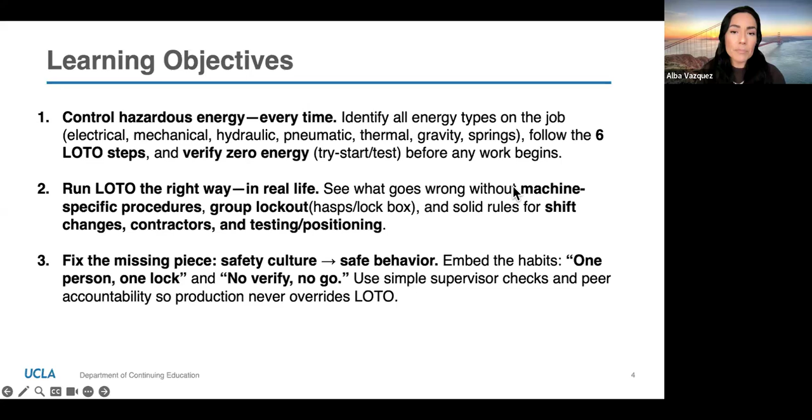And so there's this false sense of security that when they open the gate, if it's an interlock guard, they can put their hand in. So we're going to talk a little bit about that. How do we improve these issues of safety culture? All right. So why is this topic so important?

There is an actual site in Cal OSHA, or a link to the top 10 most frequently cited. Now, I don't want you to think that the only reason I want you to know this topic is because I don't want you to get cited by Cal OSHA. Mind you, most of you are coming from the supervisory or management side of the equation. So you do want to make sure you don't get citations. But the bottom line here is we care for our employees. We don't want them to get hurt because once they get hurt, it's a lose-lose situation, right?

So that's why this topic is super important, because Lockout Tagout is always one of the top 10 most frequently cited for California OSHA and nationwide. OSHA issues about 2,500 to 3,000 citations each year, most of them to general industry, because general industry is everything but construction or maritime or mining. Mining, construction, maritime, they have their own set of rules. But mind you, a lot of the people even in construction sometimes may perform maintenance activities that are considered general industry.

So mostly in manufacturing, nevertheless, that doesn't mean if you don't have a manufacturing plant, this is not going to happen to you. Remember, anytime you have a piece of equipment that needs to be repaired, maintained, unjammed, Lockout Tagout will apply. There's very few exceptions, okay? There's some exceptions, like the cord and plug. Nevertheless, this is why. And I just did this screenshot because Lockout Tagout, and then it has the regulation number 3314, California Code of Regulations 3314.

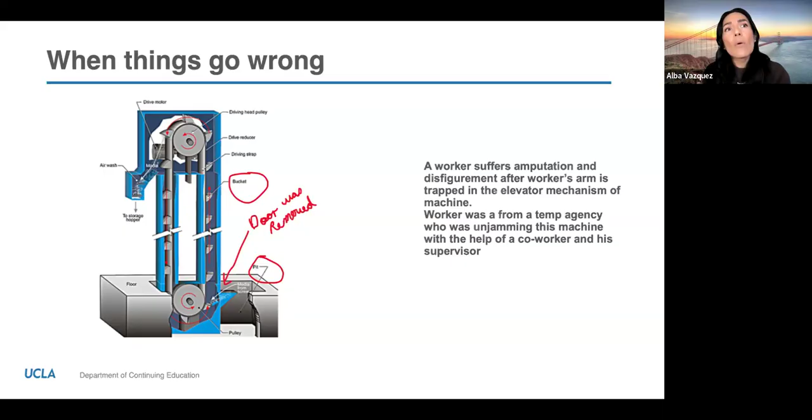So we need to always think, now investigation takes place, Cal OSHA shows up. It's important for us to now really learn from our mistakes and see what is it that went wrong. And I'm going to talk about a couple of things that would be good.

Okay, now there is a great example by WorkSafe BC. This is about a sawmill and how it just really takes seconds to lose a limb. You will receive the link for this one. Veronica, do you think that we'll have a little bit of time for this video? I'll tell you when to stop it, just to kind of look at what this one brings to the table, please. Sure, I'll go ahead and show it right now.

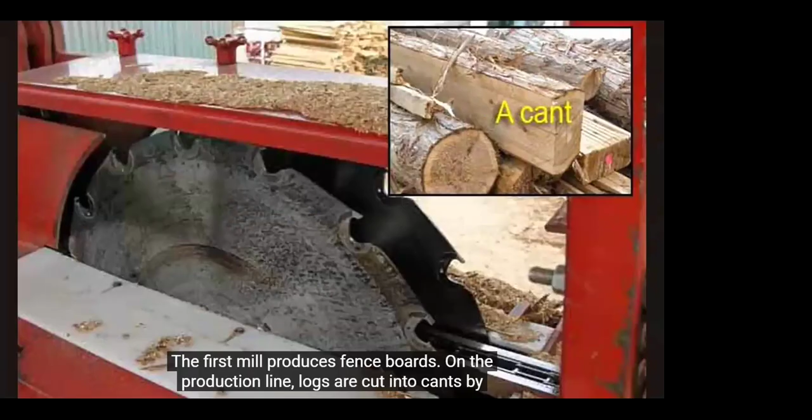I'm Mike Bertrand, investigating officer with WorkSafe BC. In sawmills, cleaning out saws and clearing jams are done all the time. At two mills, these tasks went terribly wrong. The first mill produces fence boards. On the production line, logs are cut into cants by a scrag saw. In the meantime, cants are pulled along the production line by a log chain. The sawyer feeds the cants into the edger saw, which cuts them into boards, some of which are then trimmed into fence pickets.

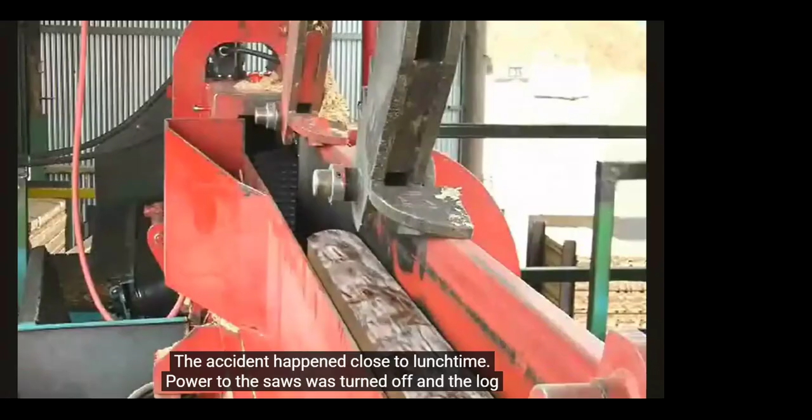Okay, so the video is not playing and I'm not going to spend more time. You're going to get the link though. The video's not playing? Oh, it's showing on my end. Oh, okay, no problem. Everybody can see it except me. That's fine. Do you want me to play it all or just stop it there then? No, it's fine. Okay, you could go ahead and reshare your screen then, Alba.

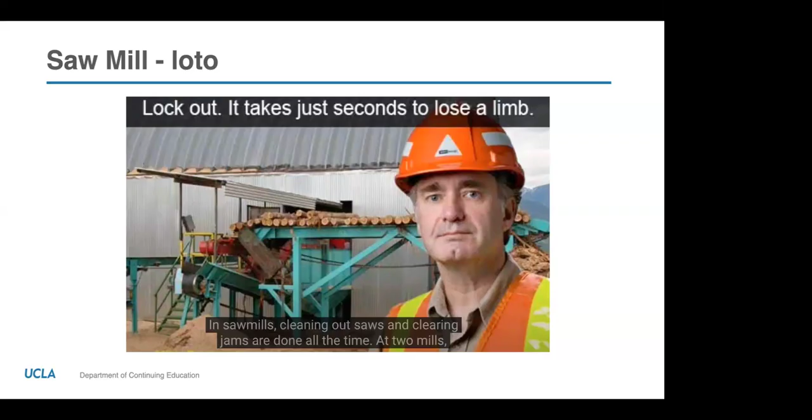So basically, the key to this one has to do with trying to clear a jam, right? How it just really takes seconds to lose a limb. What I wanted to illustrate with this video is how easy it was for the worker to just reach, because you could see the wooden debris that was jamming the machine. But with the saw that cuts these pieces of wood into picket fence type 2x4s, even if you isolate energy, there's always that residual motion from the saws rotating, and that's what got the limb off, right?

And so the lesson for this video is all sources of energy need to be isolated. So not just locked out and tagged out, but what else? What residual energy is there that we might get hurt by if we try to unjam or to repair or maintain? So this is a great video for that purpose, and you will receive a link for that one.

The next one is a great example. It is on the home page of Cal OSHA, and it's a supervisor explaining to a worker not to reach inside the machine because she's going to get her fingers cut off, and explaining briefly how to apply lockout tagout. I'm not going to play it right now; take a look at that video on your own. But I love that supervisor, very hands-on, telling her, I know this is where the jams happen often. Do not reach in. Do not put your fingers, because your finger's going to go.

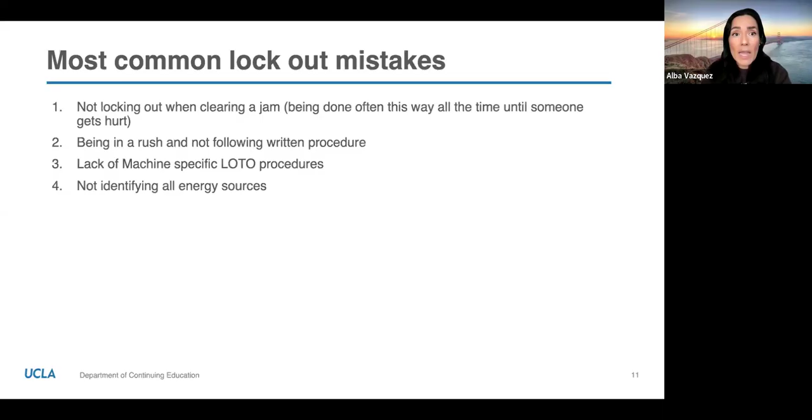Sometimes we don't identify all energy sources for that piece of equipment. And I like that video you saw with the sawmill, because the residual motion of the blades was one type of energy that needs to be identified, and the authorized employee trained so that they know how to tell when the motion has stopped, how to block it, and then they can go ahead and do the task. And of course, there are steps I'm missing, the testing and verifying. Okay, so just mistakes right now, and then we'll see the actual steps and talk about which is the most important, right?

Oh, well, here it is. Number 5, not verifying or testing that the energy has been isolated. So let's say a worker says, okay, my dough mixer only has electrical energy. I just have to unplug it, put my lock and my tag on. Energy has been isolated. That's it. And then they start unjamming, but they never verified or tested it, right? And maybe that was not the actual breaker feeding that machine, and boom, the machine starts working, and there goes their finger.

So verifying and testing before you start the activity allows you to really see that you applied the lock and the tag in the right place. Sometimes buildings are old and get refurbished, or there are changes to the wiring, and you are locking out and tagging out the wrong breaker, the wrong device.

Not using lockout tagout when equipment has an interlock system. Interlock systems are very interesting because they are not meant to be your only source of protection. Like I said, your guarding and your lockout tagout are two different safety things that protect the worker. So an interlock system is a guard, right? And so I'm going to go back to the dough mixing, if you can picture in your mind a big industrial mixer at a bakery, let's say.

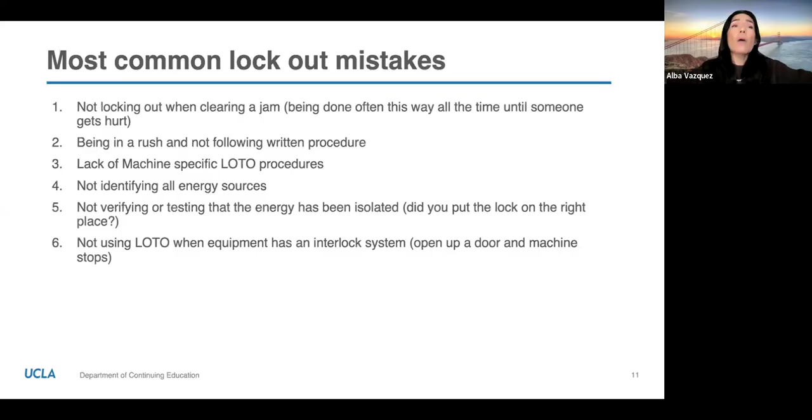Well, that's an example of when an interlock system is used the wrong way, because it's not meant for you to go and unjam it or make an adjustment. It's just meant as a safety device in case someone opens that gate by mistake while the machine is functioning, that everything stops. Oh, oops, sorry. Close it. No problem. It's a guard. So an interlock system is a guard. It's not a lockout tagout device.

Okay, the next one is the lack of training, because we have authorized employees who work with the machines and sometimes they're not on site. And so the affected employees who use the machine feel that they should fix the machine, not wait for the maintenance people or the authorized employee. And so these are some of the most common lockout tagout mistakes that we find.

Another thing that gets cited often is no audits. What you're going to find once you read the regulation is that you're supposed to review your procedures for your machinery and equipment once a year. This is never done. I don't know any of my clients that, when I start working with them, have records of the annual audits, but the better they get with the regulations and their specific procedures, they start doing them. And so that's what you want to do.

Poor communication, of course: workers around the machine or equipment that is being worked on are not informed that lockout tagout will happen. And so there is poor communication and there's this big question mark. Oh yeah, that guy is there under the machine. He's working. And then you go in and you're like, everything okay, buddy? Yeah. Did you apply lockout tagout? No, so-and-so told me that they didn't have the lock. And there's that lack of communication.

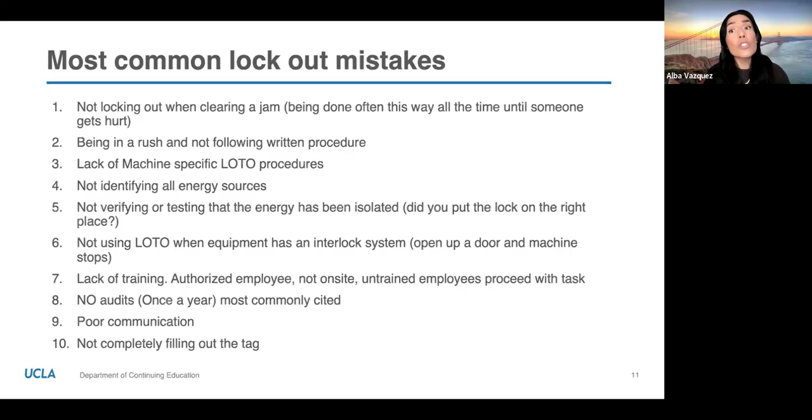Of course, there are systems where people do lockout tagout so often that they just color code or have a very good way of identifying who that lock belongs to, and so the tag is not required. You will see that those are nuances in the regulation. Nevertheless, don't get tags that have a lot of information on them and then you reuse them and have dates that are 3 years ago. So make sure that you keep your process nice and clean.

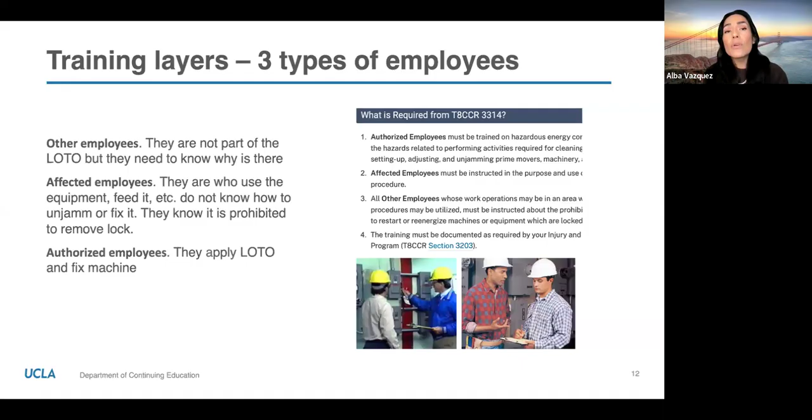Look at your tags. There are 3 training layers. You have other employees, affected employees, and authorized employees. Other employees are people that are around the equipment, but they don't clean it, they don't fix it, but they need to know not to mess with it, so they need to know what the lockout tagout hardware looks like. And what does that mean if they see the machine is down and they find a lock? It means don't mess with it. This is something that you do not want to get curious about and try and restart a machine. So that's with the other employees.

The affected employees are the people that work with the machine. They're usually at the conveyor belt, ensuring that all this food gets into the grinder. Okay, they are the ones operating and working with the machine. But if they do not have lockout tagout training and they're not qualified, and that's the word in the regulation, qualified to actually fix the machine, they are not an authorized employee.

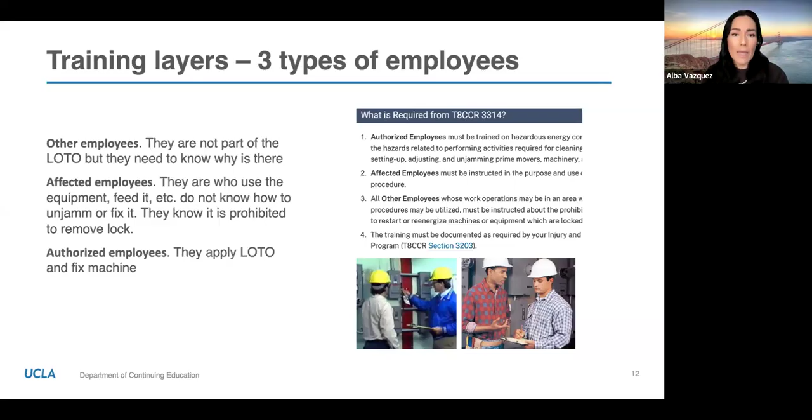Authorized employees many times are the same affected employee if they work with the machine and they also unjam and service the machine. So that employee could be both, but most of the time you have affected employees who use the machine who do not fix it. Okay, and you would have to have 2 layers of training there.

So these are advancements in technology that will help you with those robotic arms where you're thinking, I cannot go to the energy source and lock it out just because I want to enter and adjust the piece of material. And so this is a great video that illustrates the right way. The only thing I'm still iffy about is how are they testing and verifying that it's been locked out and tagged out? But it is a very good example.

I mean, the machine is locked. Both types of energies have been identified. So there's hydraulic and there is the electric. He turns off the machine, goes to both, locks them all.

He doesn't apply tags, which to me is interesting, and it could have to do with the fact that he is the only one operating the machine at that moment. The video is advertising these systems, and that's why I like this video, because it's advertising a system on how to get your robotic palletizing cells compliant by having a system of a trapped key.

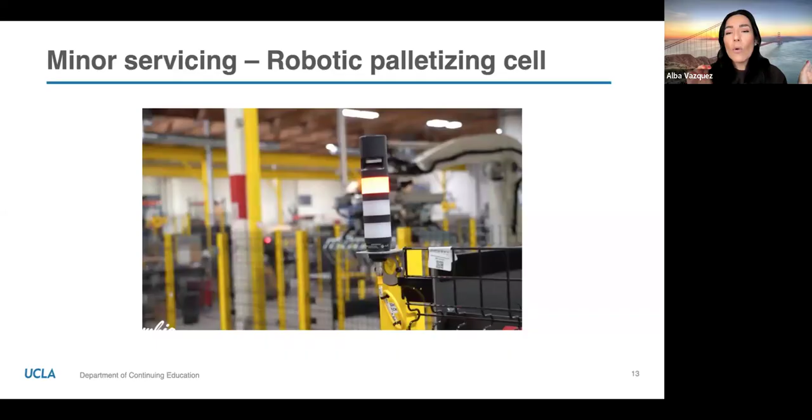That's just the guard. The guarding requirement is that you isolate the moving parts from the worker in case of accidental contact with the moving part. It's not intended for you to go in there and adjust or unjam. But if you're going to make an adjustment, which often we have to do with palletizing robots, the robot did it, it's just a little bit off, you go in there and just move it. Well, that's an adjustment. You have to lock it out. And the video shows how quickly and how easily that can be done.

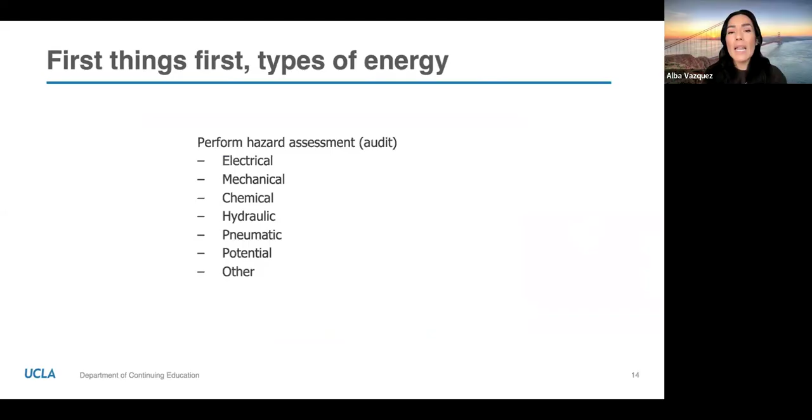All right. So first things first, you have to do an audit to determine the types of energy that feed your machinery and equipment. So from electrical to mechanical, chemical, hydraulic, pneumatic, potential, and others. And you can use forms like this one where you find the hazardous energy power. So if it's electrical, is it battery operated? Is it a capacitor that also stores energy?

What is it? And then the energy isolation disconnecting device. So is it a switch? Is it a motor control? Is it a power panel, right? And then you may have like 5 different power panels. So which number? Which one is the one that you are identifying as the one that feeds that machine?

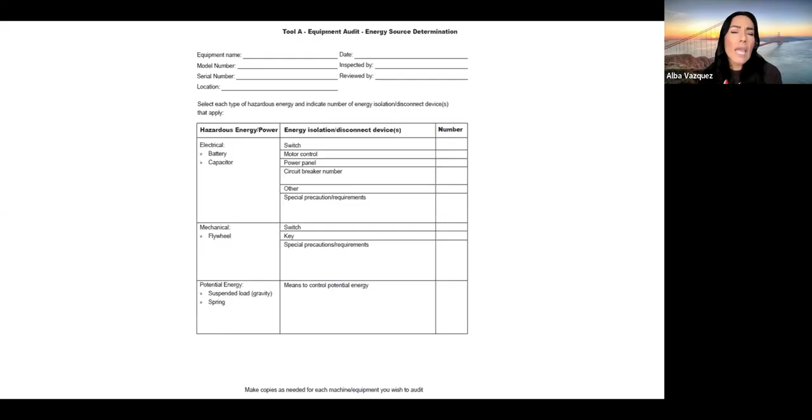Mechanical energy, potential energy. And by the way, these forms are Cal/OSHA forms. I don't think they're on the website, because they update their procedures, but I like these forms. I still use them. If you want them, I can also attach them to the actual presentation file.

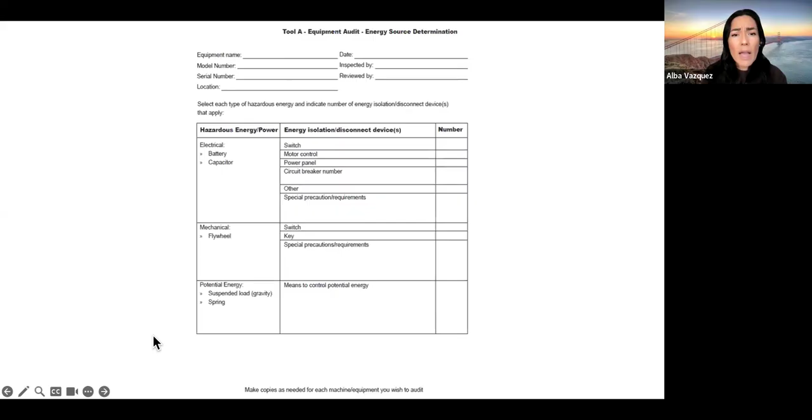But you see how awesome it is, because then you go through each of them and at the end, is there any other? So please fill in the energy isolating or disconnect device for that type of energy. And I don't think on this list you have gravity, suspended load. Yeah, you have suspended load gravity on that first page. So pneumatic, chemical, thermal, etc.

Okay, so here are your 6 basic steps to lock out and tag out a machine. You prepare for shutdown, and when you prepare your shutdown, you have to tell people. Here's where the regulation requires that you go, hey, everybody, we're going to fix this machine, or we're going to unjam this machine, so I do not want you to mess with it. We're going to apply the actual lockout/tagout. And then shutdown, isolation, applying the tags and locks, control residual energy, and verifying.

So here we go. The purpose of preparation for shutdown: knowing the hazards touching the machine. So before we even start this activity, we need to go to all of those identified energy sources, right? And now we're going to get our specific written procedure.

Take a look at it. Many times you already know it, and you will see in the video with the palletizing cell that it's something that he already knows, but it wouldn't hurt to have the laminated procedure step by step there. Number one, preparing for shutdown. Tell everyone around that you're going to do lockout tagout. Step number two, that kind of thing. Just a quick reminder for the worker who's going to be doing it, right? And it's a written procedure specific for that machine. Notifying all the affected employees, right? Very, very important.

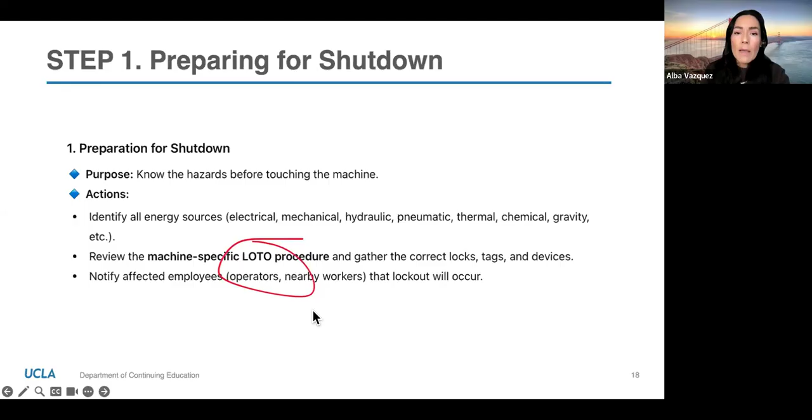Then machine or equipment shutdown. Stop the machine using the normal operating procedures, such as the off or stop button, and you wait for moving parts to stop. You will see in the video with the sawmill that that's what was missing there. The worker did not wait for the moving parts to stop, did not ensure all controls returned to neutral. And so all of these things are part of your step-by-step procedure, right?

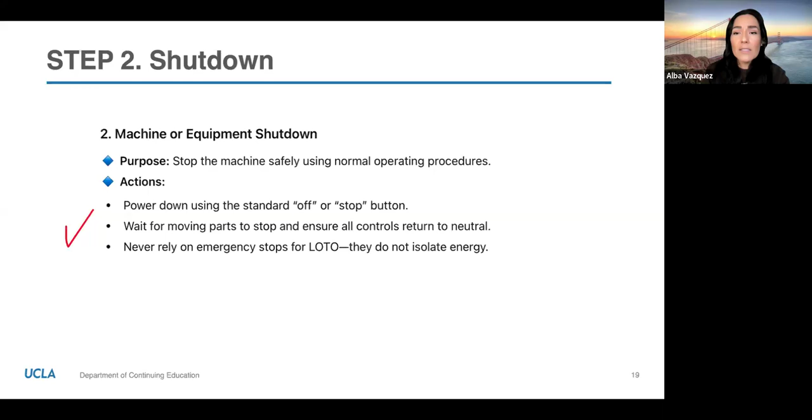Do not rely on emergency stop buttons, right? Because they don't isolate energy. Step 3, isolation of energy sources. You've got to open disconnect switches, close valves, block or bleed the line, because you've got to really do the job of isolating each and every one of the energy sources that you identify. Each energy source has its own isolation point. So there are requirements nowadays for your main breakers to have a way to attach lockout tagout devices, right?

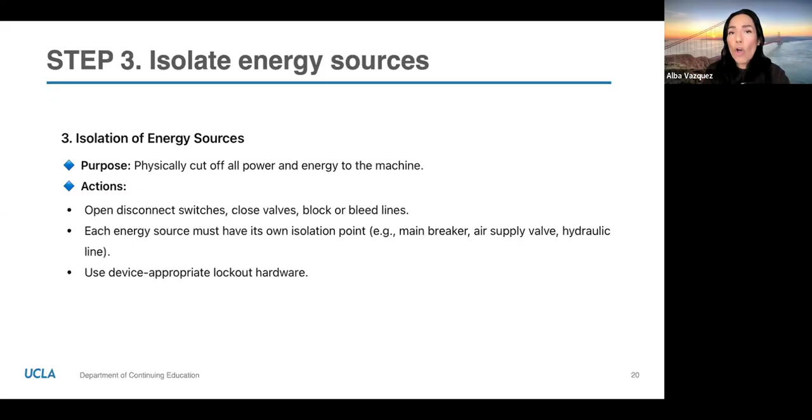And they also make hardware, for example, for air supply valves or hydraulic lines. They make devices so that they can be locked out and tagged out. So it goes around the valve, for example, a circular thing. If your valve is in circular form, then there's a device that goes around it, and it will accept a lock because it's required. And then you use appropriate lockout hardware, not just any lock, but specific for lockout tagout, and you buy it from your safety supplier, right?

Then you apply the lockout tagout devices, which is securely applying the locks and tags to all the isolation points. Each authorized employee, because we said the authorized employee is the one that will fix or clear the jams or service the machine, will put his own lock and his own tag. One person, one lock, right? And the tags include the employee's name, the date, the reason for lockout.

And then for group lockout, there's other requirements, but that happens when a machine is complex enough that when it's down, it needs maybe the electrician, the mechanic, two, three people to work on the machine. And so the way you do this now would be applying group lockout. So you buy a box for group lockout. There's a main individual who will say, okay, I'm going to walk to each of the sources of energy, I'm going to apply the locks, and the keys to those locks go inside this box. And you guys who are working on the machine are going to attach your locks to the box. It all matches and rhymes.

But here is another video that I think does a great job at explaining group lockout tagout. And of course, it's a TRADESAFE products video. So they are trying to sell you the group lockout tagout devices, the box with the actual hardware, but it's very nicely explained. Like I said, if we had more time, I would play all of these videos, but at least I'm giving you the information, I'm giving you the tools, so you go back and say, oh, wow, okay, this makes sense.

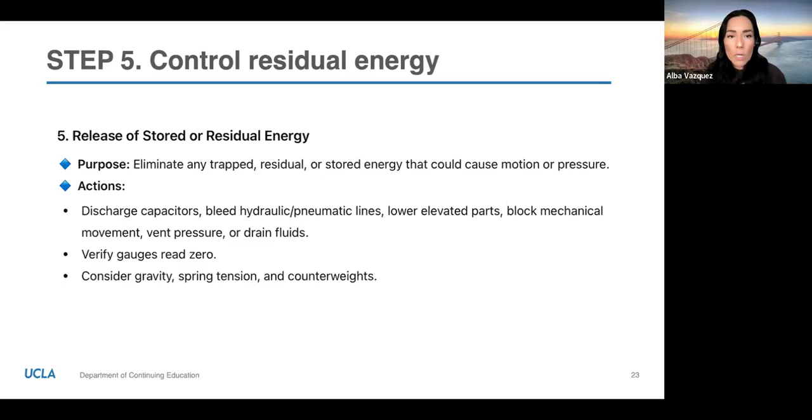So very cool. And last, verification of isolation: you try, start, or test. If it's electrical, you're going to test that there's no electricity going to the machine. It's the attempt to start that machine and equipment. So you are going to press that start button, and little did you know, the machine started when you pressed the start button.

You're thinking, what? But I applied the lock, right? I applied the lock, and when I pushed the start button, it started working. Something is really wrong. I am so happy that I am following my procedures, because I'm verifying that I truly isolated the energy, and I didn't. So as you can tell, the most important step of lockout tagout is not applying the lock. It's actually this step, verifying, testing, because now you test and the machine starts.

And so you go back to your electrician and they go, oh yeah, we worked on some of the wiring over here and we transposed this and blah, blah, blah. We're working on the plans to make sure that we let you know, and we haven't labeled it. And you're like, thank you, right? But this is why this step 6, verification of isolation, matters.

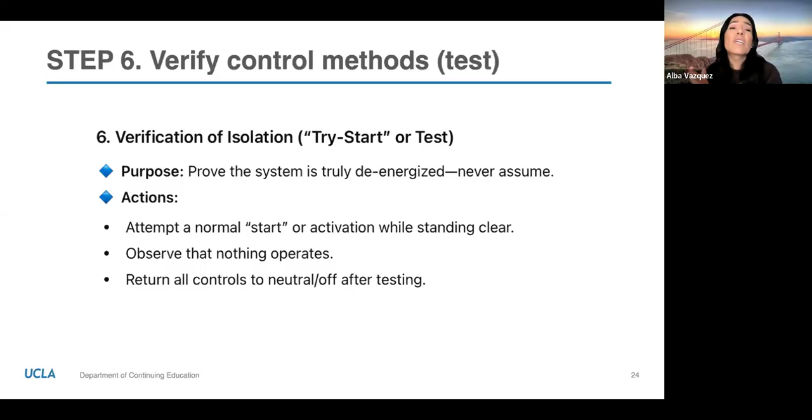And then just a sample, this is a general one, okay? This is the type of lockout tagout procedure that many of you have as your written lockout tagout program. So you take a form like this: this procedure establishes the minimum requirements for lockout tagout that could cause injury. Responsibility: the responsibility for seeing that this procedure is followed is binding upon all employees. Preparation for lockout: employees authorized to perform lockout shall be certain as to which valve and other energy isolating devices apply.

This is too general. You take this format and make it specific to machine number or lathe, and you mention the actual model and make, and you put it into your written procedure. That's why I like this one a little bit more, because it goes: which department, equipment number, location, old boiler room, the potential hazards, pneumatic, electrical, whatever it is. Methods of neutralizing, relieve pressure, lockout, tagout, very specific to notifying the production supervisor and the affected crew.

After completing step 1, shut down the equipment. If you are not sure how, contact the supervisor. Lock out the equipment following the lockout procedures at the wet transfer roll cabinet. So now it's very specific as to what location, where it is. A lot of people add pictures to this, which is a fantastic idea. Some of you also have to get safety permits, like a hot work permit or other types. It's a good idea to have safety permits before the maintenance activity takes place.

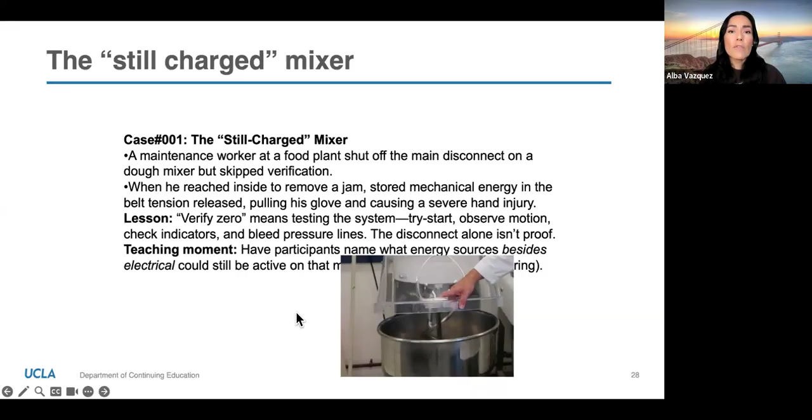We do have some exemptions, which I can't get into, but plug and cord, or when several machines are identical. And if they're identical with the same sources of power and they can all be put in one single procedure, then that's okay. So you have to take a look at your machines and see if you can put them all or group them all in one written procedure.

So remember, zero energy means zero movement, zero pressure, zero voltage. Use the following mantra. I love this one. Identify: how many types of energy? Isolate: we've got to really stop that energy from being released when we are unjamming, servicing, maintaining, and adjusting, or setting up or clearing a jam on this machine. And once I isolate, I need to verify. So I love that mantra.

And by telling you to use the mantra, identify, isolate, verify, I don't want you to think that those are the only steps. We went through the steps, but during training, it's important that you know, guys, these are the 6 steps. This is how we do it. Verification. Remember, verification is often the missed step in real world incidents, right? We talked about the ones that OSHA has out there, like the dough mixer.

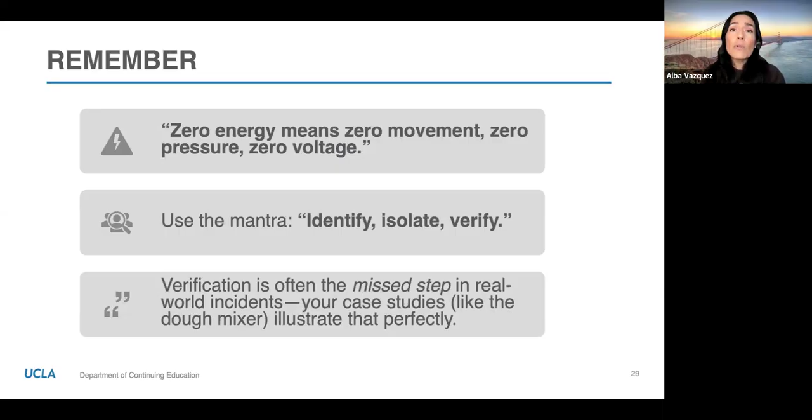There's a good one on the Federal OSHA site and the training videos where an electrician opened up a breaker and he was electrocuted and died, because he locked out and tagged out the electrical energy to the panel that he was fixing, but the wiring had been changed years ago. He didn't know it. He didn't verify. He didn't test, and he died. So a simple step gets missed, and these types of injuries with lockout tagout are bad.

So for the safety culture gaps: they've done it this way for 10 years, nothing has happened, so it must be safe. That's out. We don't want that. Okay, so if they're doing it because of time constraints, time pressure, it takes too long to find the maintenance guy, the underlying belief is always that production matters more than procedure. Let's just keep going. We've done it like this before. It's okay. It's safe. Nothing happens. You've got to train and educate, and also do disciplinary procedures when people, in spite of training, continue to do it the old way. When OSHA shows up, they always want to see that you have an effective program, and that includes records of disciplinary action.

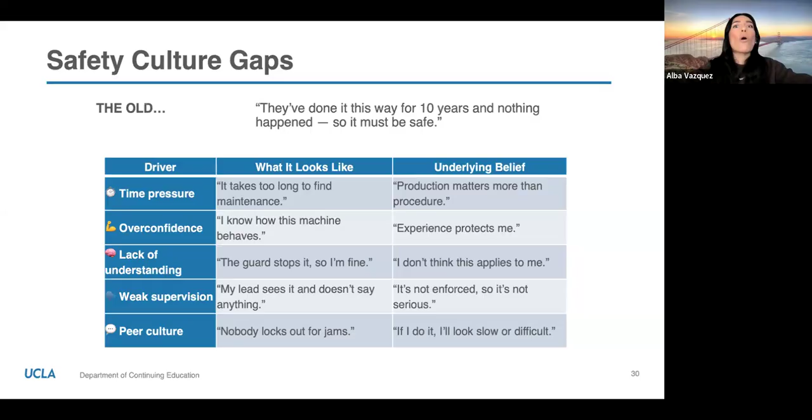So sometimes it's overconfidence, I know this machine, I know how it behaves, my experience protects me, or that lack of understanding. And it's good to bring something like this. Use this slide if you want during your training and say, I know a lot of you are overconfident because you think your experience protects you. No, you will be disciplined if you don't follow the procedure. And a lot of the time the more experienced guys get really mad at the newer guy who just took training and goes, hey, wait a minute, where's the procedure? I'm not rolling with you if we don't do it like we were trained. And that helps.

Okay, so we need good leadership habits that build safety culture. So the first thing is to model it, right? It's leading by example. So let's lock it out before clearing it, even if it takes longer. Come on, guys. Never walk past the violation. If they are doing this without following procedure and you see it, don't ignore it, because it'll be repeated.

And praise correct behavior. People like to be praised, and coach privately. So positive, safe behavior, praise it publicly so everyone sees. But reprimands and disciplinary action, do them privately, because that way people don't get embarrassed, right? And everybody learns. Tie accountability to performance, incorporate safe work practices into evaluations or incentives. Don't incentivize non-reporting. If you're incentivizing that with a 255 days without injury sign, if people get hurt, they don't want to say anything. So don't incentivize the wrong way.

That's something else too. If you have questions about it, that's a whole other topic that we can go on about for another hour. What time is it, people? Questions, please, because we are 3 minutes over our limit.